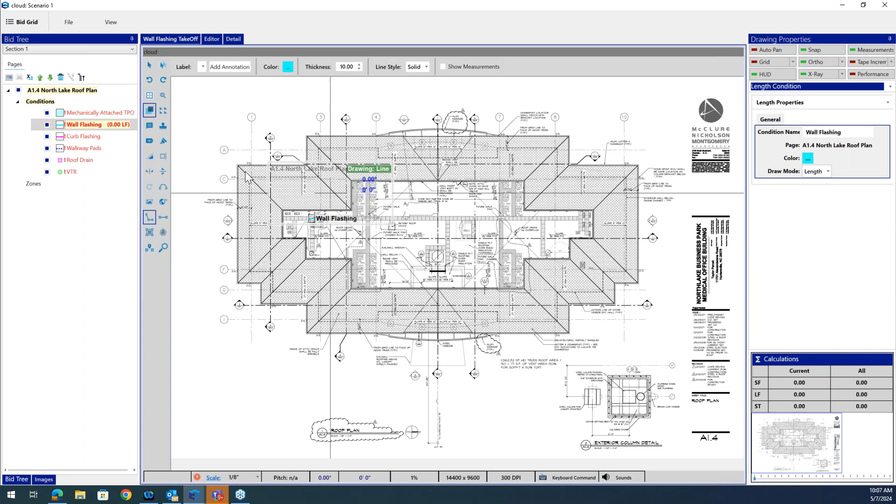So I just essentially move around the perimeter of the roof. It's going to give you a corresponding color and the map associated with it. Again, it's all set up the way you want it, it's customizable. If you don't like this feature in the upper right-hand corner, measurement can be turned off.

What you can't see, since this is designed for multiple monitors, is that as soon as I finish measuring the TPO here for this roof, on my other screen, everything for that TPO item-wise has been brought over. I'll show you that here shortly. Here's your square foot, linear foot, and the segment termination number of turns based on that TPO.

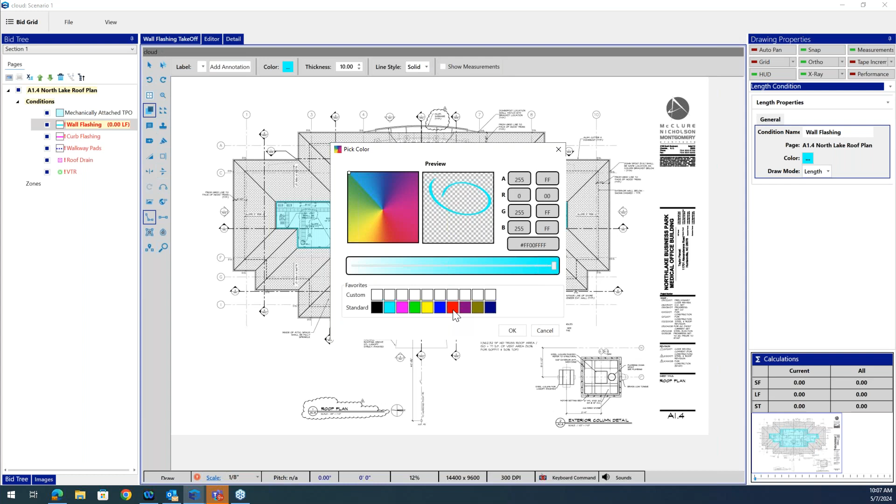Throw in some wall flashing. I can change the colors. There's a lot of bells and whistles on here you can do. I won't show you all of it. What's important is the data.

As you can see now, it's snapping to my previous point, giving me that square. Again, if you don't like that, in the upper right-hand corner, you can turn it off under snap.

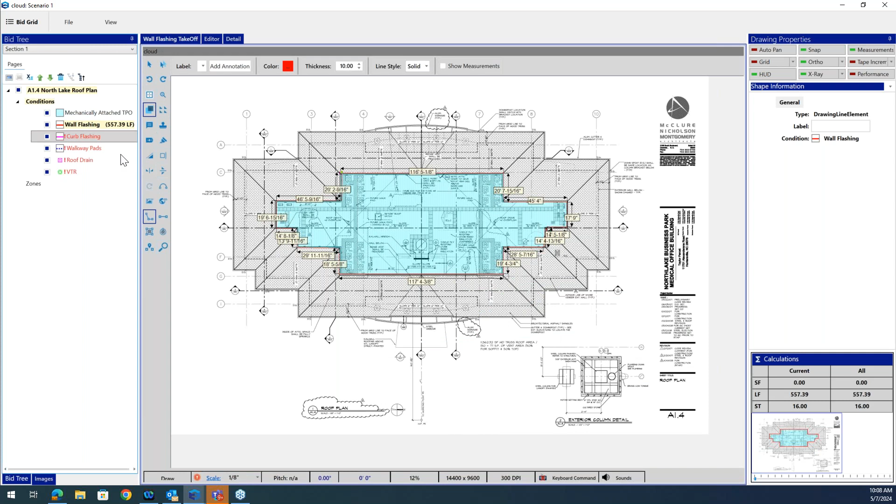I'm not going to measure all of this for the sake of time. I just want to show you the data it gives you, which is really what's important. Here's your linear foot down here. Throw in some curbs. I can zoom in or out with my mouse.

It's important to note that the Edge is not a static program. What you see here out of the box is not the same next quarter. We add new features and functions all the time. There's no additional charge for that. It's just up to you to download it.

So a lot of the programs on the market today, what you see is what you get. Not the case with the Edge. We're constantly understanding that technology changes, so we have to keep up with it. We just try to make it a more efficient system than it already is. And a lot of the new features and functions we add into it come directly from our customers. I mean, we know estimating, but not as well as you.

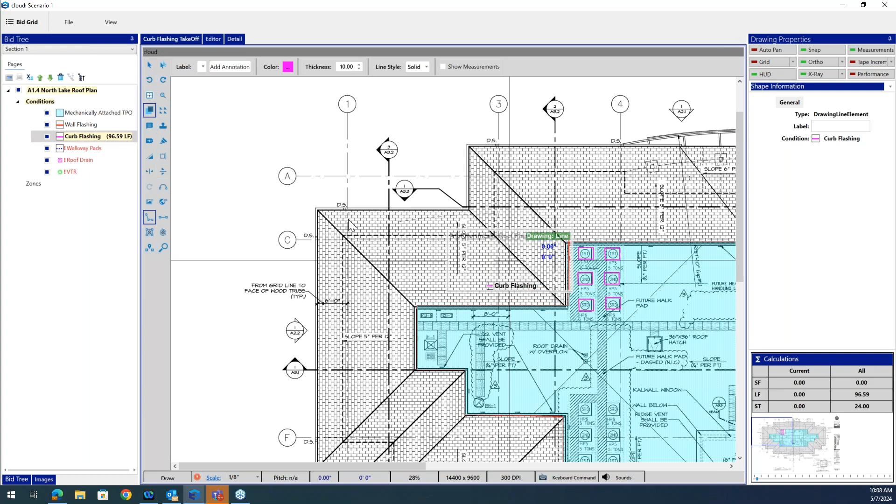So there's some curbs. I'm going to throw in some walkway pads, so there's some more information. I can highlight, I can point. You can do saved annotations, text directly on here. You can do URLs directly out of the takeoff screen as well as images. So if you want to see an image, say from a manufacturer of an item, you can put it directly onto the takeoff, which is somewhat of a new feature for us too.

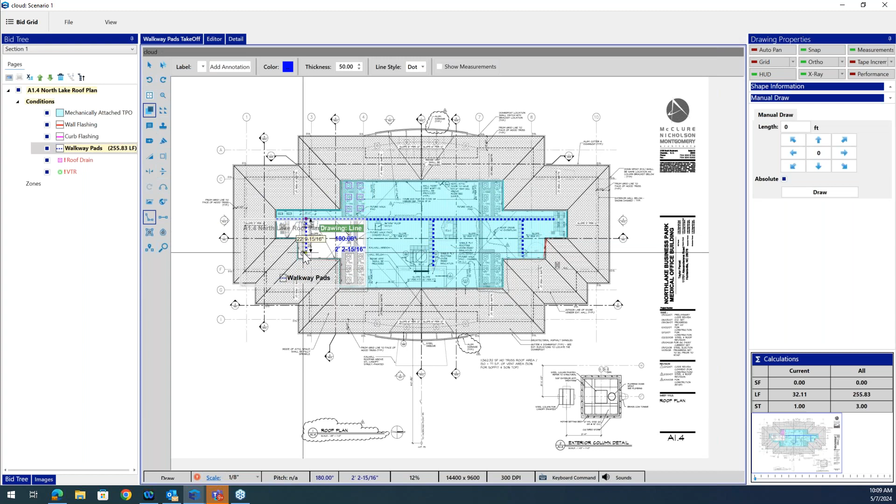Also, if you have not done any type of CAD-like drawings, such as this one, or takeoff, there's a number of things that will help you. Like, for example, there is no walkway pads up there, obviously, but if I come over here, I can hit undo and it'll go away. That'll become a good friend of yours as you learn the Edge.

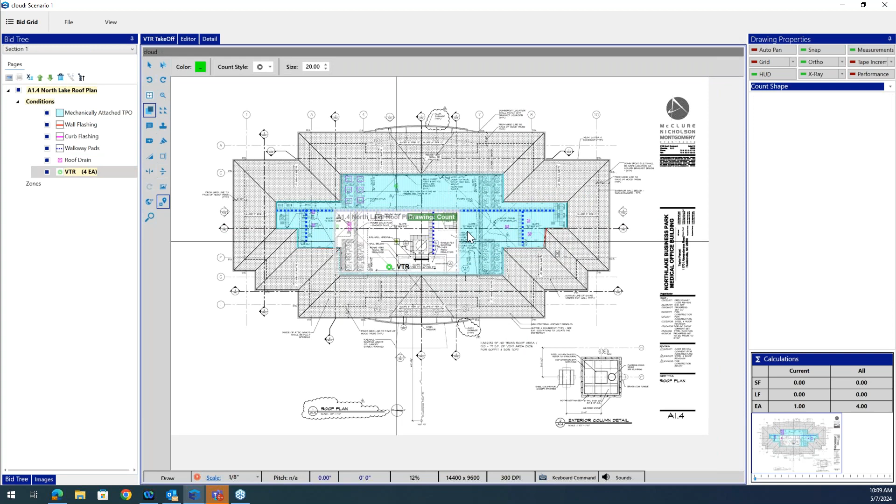I'm throwing some roof drains, so we have some data, and some VTRs. Let me get out of this, X out of my takeoff, go back into my conditions. Here's your square foot, linear foot, and counts for each one of those conditions I just measured.

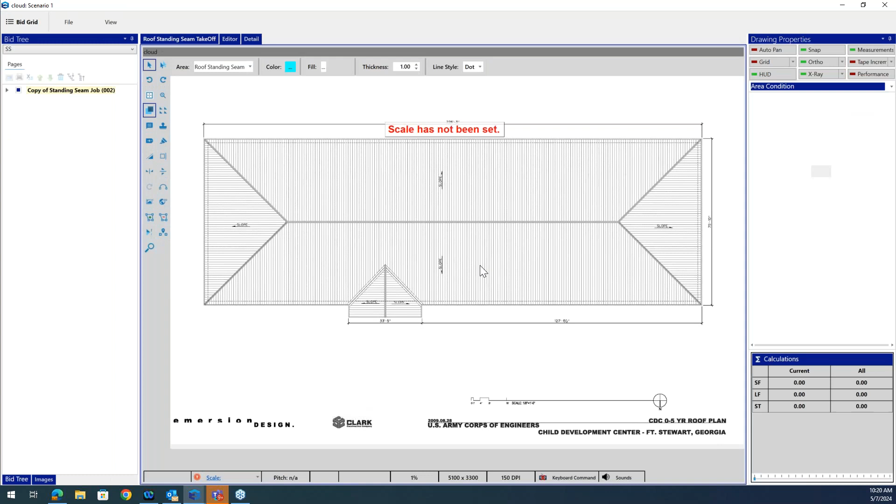If I'm good with it, I go back into my takeoff screen. Here's the scale. I can set a scale here, or I can trust it was sent over, again, from the architect down here. So I hit scale, hit the drop down box.

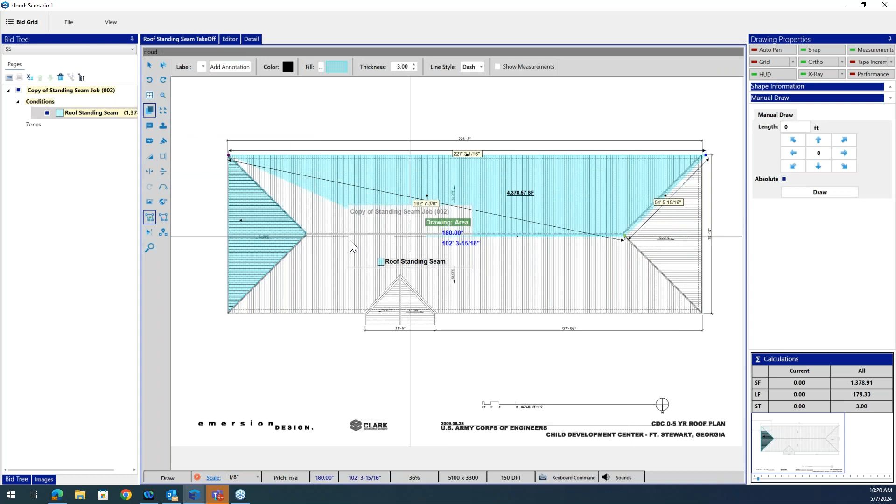From here, I just measure each section of this roof, and you give it color. I'm going to do the high-low, which is essentially the water flow. If I choose to, I can do the entire roof at one time or each section individually. Again, you can see it's snapping to my previous point.

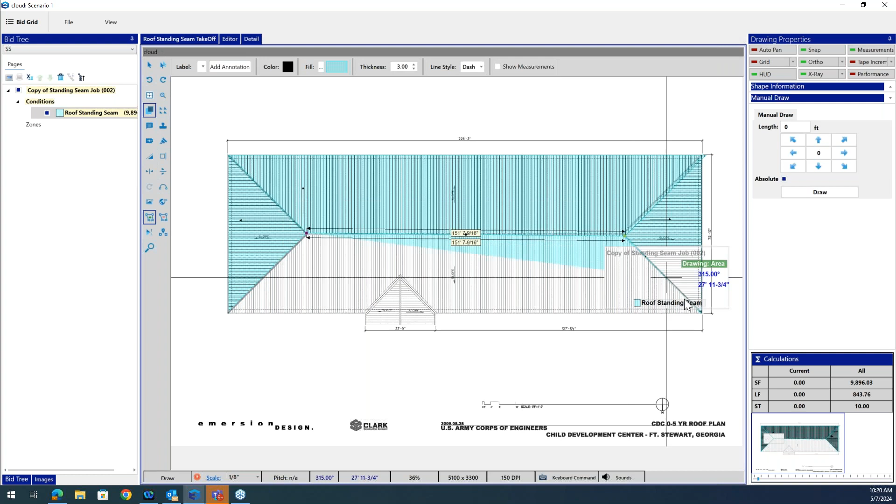Now this is an add-on. It's separate from the main roofing module. It comes with the edge. But if you do any type of standing seam, this really simplifies your life, as it gives you the entire cutout list, which I'll show you here shortly.

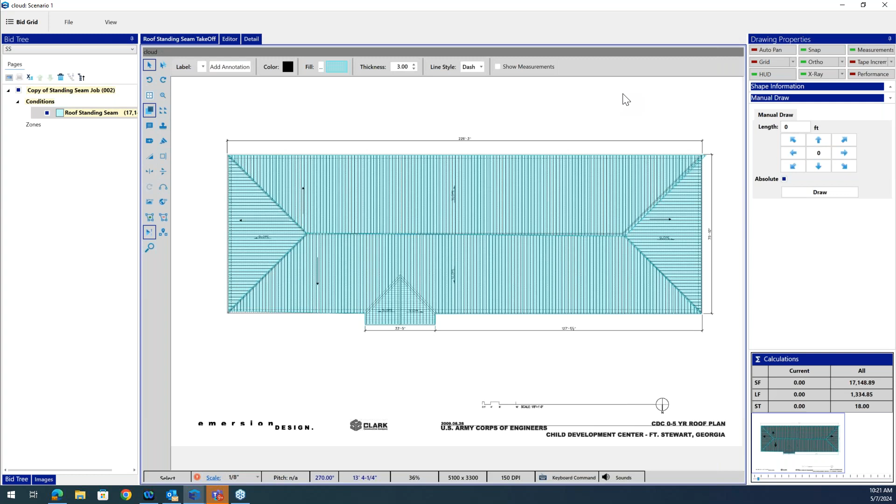Same thing with our tapered insulation module. Most people choose to send that off to their manufacturers. Sometimes it can take a week or two to get back, and a lot of times the waste is inflated. You control all that because then, of course, you now have it in-house.

So I'll go back out here, back into my reports. I now have a new report that's been generated here. So if I'm going to run that, here's the first report, labeling each one. Let me increase the size. Labels each panel for you.

Here's the next one with the cutout list, which is kind of nice. Here's your quantity, labeling each one, and the length of each panel for you.

So what I suggest, if you have multiple licenses and you adopt the edge, is you can put it on one license to start with. And whenever you have standing seam or tapered insulation for that matter, you can just simply pull that license to complete it. So what the edge does is it really streamlines your entire process.

As I mentioned at the outset, you can complete the entire estimate and takeoff in one platform. And additionally, you now have a reporting function associated with it and the portal.

Also in the portal, we added this a few months ago, which is really nice, really completes and closes the circle: we now have the ability to do different proposals in the edge directly from the edge itself, which is nice. You no longer have to generate your own proposal. We have the ability to do that right here. So from there, from the proposal generated in the edge, you can add in the reports directly into it and send it out to your customers.

So that's the main part of the edge. We can get really deep in the weeds if you choose to, and you have more questions, or if you want to see the edge individually, please email me. Again, it's sferguson@estimatingedge.com, that's S-F-E-R-G-U-S-O-N. And we can set something up individually, discuss the edge and how it can benefit you. Are there any questions?